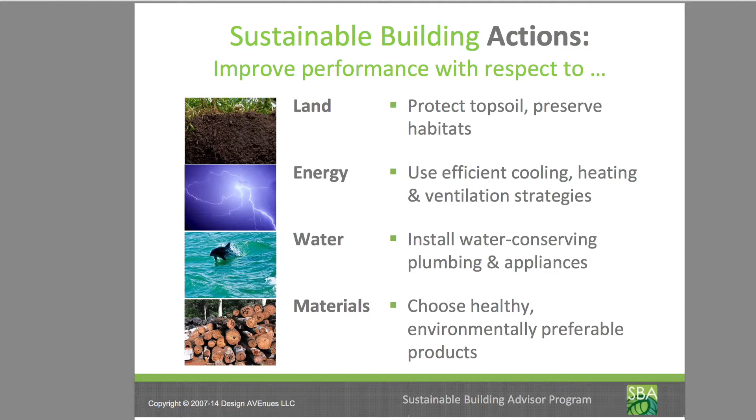Energy—you just heard from Robert about a number of strategies in this building. Lighting technologies, daylighting technologies, shutters that moderate our use of daylight, and effective heating and cooling strategies. There are many building enclosure strategies as well.

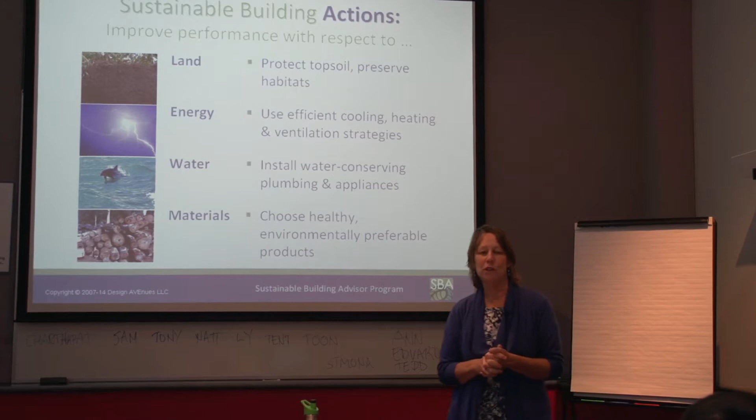Do we make buildings more airtight or more air permeable? It's probably a very different solution in Thailand, with a warm, humid climate, than in our California desert, where it's very hot and dry, or up in the mountains to the northeast, where it can be very cold. California has 16 climate zones that are quite distinct. It's particularly humorous because the whole United States is usually characterized as having 6 or maybe 8 climate zones, but we have 16 just in one state. So it depends on how granular you get.

We can break down those 16 even more into microclimates, and sustainable building design takes into account the climate and microclimate in which the project occurs. We have to be very plugged into the appropriate solutions for the particular location, rather than using rules of thumb, which can be very misleading.

Water is a very important issue for us in California right now, as we are in the middle of a drought—the most severe drought we've had in probably a half century or more, certainly within my living memory. We tend to be drought conscious in California because we go through cycles of drought, but in between we get lazy again and have to be reminded that we live in a drought-prone area. But worldwide, we have a freshwater shortage, because many people on the planet do not have adequate fresh potable water.

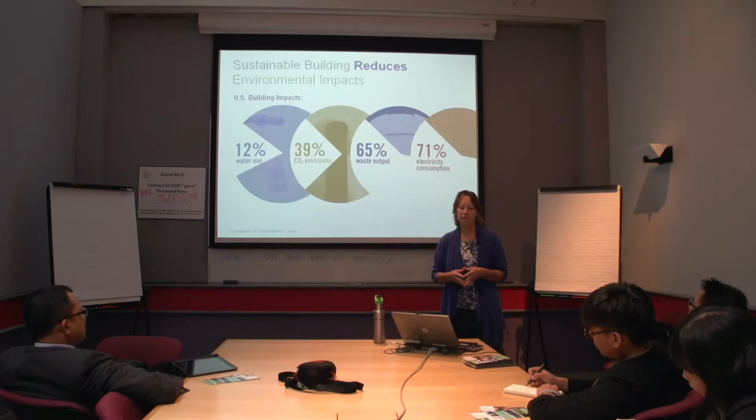Of all waste output, 65% comes from buildings. All carbon emissions, 39% from buildings. And water use, 12% from buildings. Water is still not insignificant, but of course the biggest water users are agriculture and industrial processes. Nevertheless, lots of opportunity for us to do much better in all of these categories.

So equally important, and really in terms of going back to Thailand and talking to other people about sustainable building, the thing that people tend to get most excited about is health, because health affects all of us and our families. I heard a statistic the other day that said something like 20% of all deaths are caused by cancer. And cancer, I think, is something that frightens everyone.

No one wants to have cancer, and we have more and more awareness that the decisions we make in creating the human environment often have implications for health. So we want to be more responsible in creating buildings that are healthier.

The U.S. Environmental Protection Agency tells us that we spend 90% of our time indoors, and the air quality indoors is many times worse on average than it is outdoors. So how crazy is that? We need to be doing much better than that, because right outside our buildings is air that is generally better quality than what's indoors. So let's get that fresh air into our buildings. We have the knowledge, we have the sophistication to do that. We need to be doing a much better job.

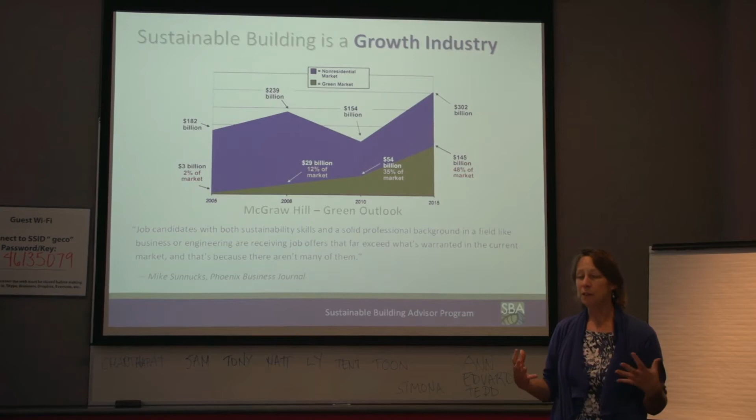It's also growing. And even so, here in the US, I expect it's maybe not too much different in Thailand, we have been in a bit of an economic downturn since 2008. Things are starting to look up. But you can see that even at our lowest point in the construction industry, the green building portion of the market was still growing. And when things started to pick up, it started to climb out even faster than the industry as a whole. So this is the healthiest, most vibrant part of our construction economy here, which is very exciting. It means lots of job opportunities in this field.

We firmly see that this is the future. Right now we think of sustainable building as something different and new, and yet it is going to be the new normal. Everything is moving in that direction. California tends to be at the forefront within the United States, and the rest of the country eventually seems to come along with our crazy liberal ideas. And then often much of the world looks to the US and follows. So I would say certainly from a California and US perspective, this is a very clear trend.

And this is just one example. There are numerous quotes and graphs, and they all support the fact that this is the direction we are going. It really is no longer a specialty, it's getting into the mainstream.

And this is even more true for younger people, that this youth sensibility towards building sustainably, this is just the right way to do it. They look at my older generation and say, why did you ever do anything differently? Crazy, stupid old people. So that means we're raising them right.

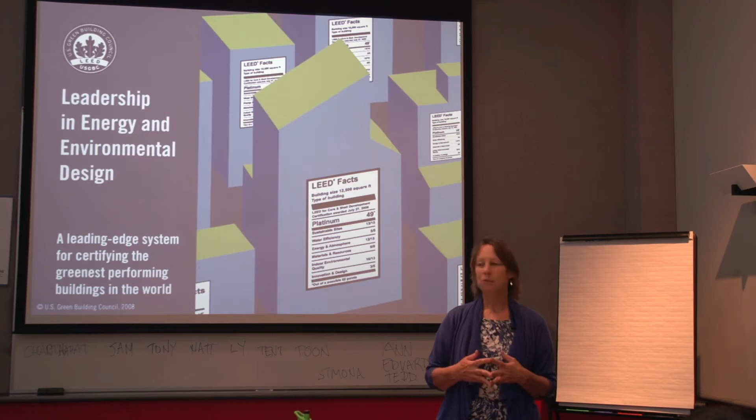I don't necessarily think all the new things in LEED version 4 are necessarily the right way to tackle these problems, but that's how we learn, right? We try them out and then we learn how to do them better.

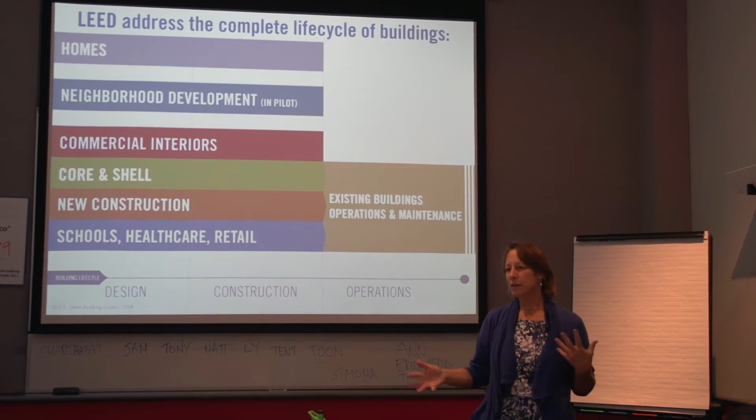You probably also know that LEED addresses all types of buildings across the life cycle. So it's a very comprehensive suite of programs, which can make life very complicated, but it's helpful.

Some baseline requirements: you're probably well aware of certified, silver, gold, platinum, that there are certain mandatory measures or prerequisites you have to do in order to earn the rating. Above that, there are points to be earned, and in some cases a minimum number of points within categories based on the rating.

So in the world beyond LEED, what happens next? There's a lot of debate even around the term sustainable building. Some people say, well, sustainable, that just means you're hanging steady, you're not really making progress. And green building, so-called sustainable building, has been criticized by many leaders in this field.

They say, well, you're just doing less badly. We've generally done very badly in creating our built environment. Now we're going to do a bit less badly. Okay, we're happy with an improvement, but can we go beyond that?

So now the hope is to really move towards projects that are truly restorative or regenerative. Certainly LEED can still provide very effective guidance in that direction. But I think it's always important to think that rating systems are themselves support, guidance, but they are not all that is possible.

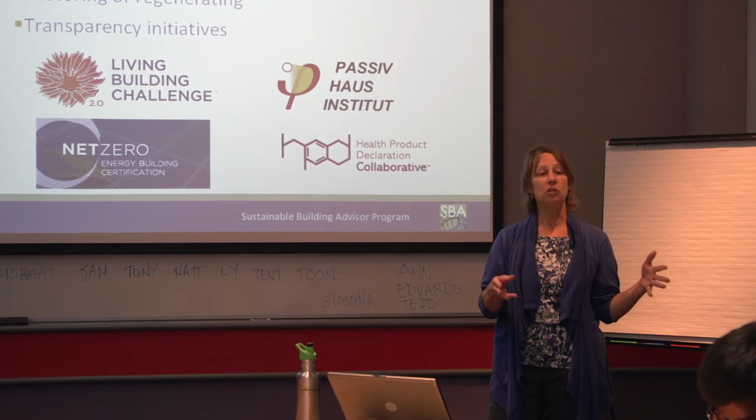Both Living Building Challenge and Net Zero require a year of operational data before the certification is given. So unlike LEED, it's not a program that was developed to assist in marketing a building, because by the time you have a year of operational data, you're probably not in the market anymore - you have occupants, it's been sold or rented or whatever. However, I think even presenting the notion that this building is pursuing Living Building Challenge or pursuing net zero will have some market attractiveness, even though it's not that kind of thing. You can't say we have it, we're pursuing it.

Passive House - any of you heard of Passive House? This is another one that's taken the US by storm in the last few years. It was developed in Germany, but interestingly enough, it was based on principles developed in the United States by Amory Lovins at the Rocky Mountain Institute, who's one of our real energy pioneers.

Passive House is a program primarily tailored for a Northern European climate, where a hard target of energy usage is set in terms of units of energy per square foot of building per year. A maximum energy use for heating is set, and a maximum rate of air leakage is established for the building. In a climate where it makes sense to have open air circulation, Passive House might not be the most sensible standard, but you should be aware of it because it's kind of the new darling in the world of sustainable building, at least in the US and Europe.

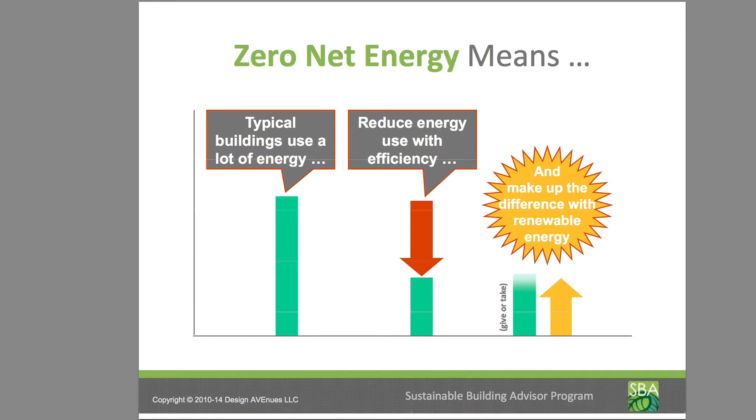And I mentioned zero net energy. This has been a huge focus for me for the last 5 years. In fact, 5 years ago now, right this time of year, I was launched into writing a book on zero net energy homes, and I've spent a tremendous amount of my time since then educating others about it in this energy center, as well as throughout the state and country and even beyond. The goal is to get not just our buildings, but our communities, to be more self-sustaining on an energy basis—so the energy we require to run, we then put back into the system by having renewable energy systems on our rooftops or adjoining structures, or through collaboration at a community level.

So that is the basic idea: we start with a building that uses a certain amount of energy, and we can almost always reduce that energy substantially. It's easier if it's a new building than an existing one; we have more challenges when we're not starting from scratch. But either way, our goal is to get our energy loads down to a fraction of what a normal building would be.

We can usually reduce energy use in a new building compared to a traditional one that meets building code by a good 60% or more if we really put our minds to it and make it a goal. With an existing building, it varies tremendously, but it might be 20%, 40%. We might get to 60% if we're really ambitious.

One of the conversations I often hear is, how much extra does it cost to design and build a zero net energy building? My answer is, it doesn't cost extra if that's part of the goal. Any more than the countertop in your kitchen costs extra if your goal is to build a new kitchen. If it's an essential part of your project, it's never extra. It's just a question of, I have my budget, how do I spend it in order to achieve my goal?

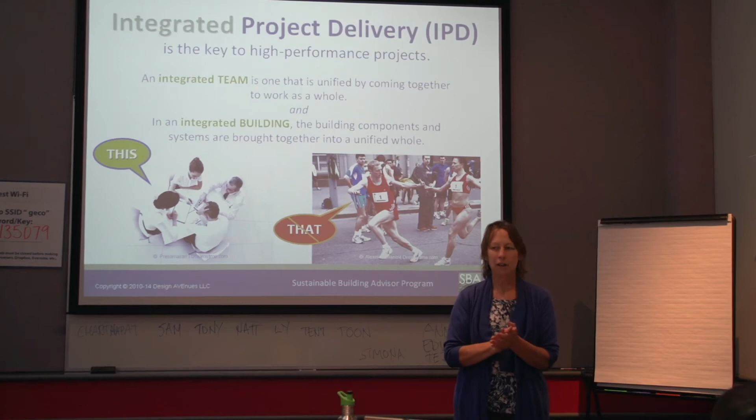First of all, the idea of integrated: it's how we work, and it's also what we produce. In terms of what we produce, the building, we achieve the highest performance through an integrated project because the systems all work together and complement one another. And we achieve that as a team because we need the different understanding, experience, background, and technical disciplines from all the parties on a project team to provide what they know in order to achieve this.

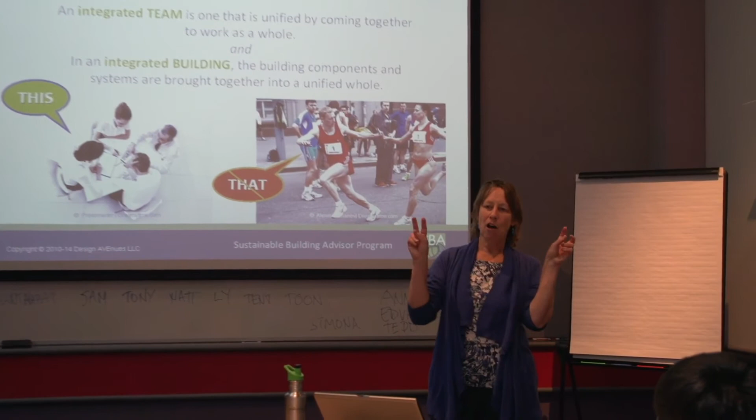I'll give you an example. Probably about 15 years ago, one of the big ahas in integrated design occurred when the US government funded a number of research teams through a program called Building America. Building America was a public-private partnership in which the federal government, the Department of Energy, provided seed funding to a number of energy consulting firms in order to allow them to work directly with American home builders, product manufacturers, architects, engineers, and trades. The charge they were given was to create the next generation of American housing that is more energy and resource efficient at zero or very low incremental cost.

And that sounds kind of crazy, right? But they said, you need to work together to figure this out. Well, what they figured out, because they worked together, is they got all those different players around the table and kind of scratched their heads and said, how are we going to do this?

One thing they learned relatively soon was, if we make our building enclosures tighter, so less of the air we're heating and cooling to make buildings comfortable is leaking out immediately, and we put in better windows, better insulation, we're doing a much better job on the building enclosure. We can reduce the size of the heating and cooling equipment substantially. The savings in the reduction in heating and cooling equipment paid for the other improvements.

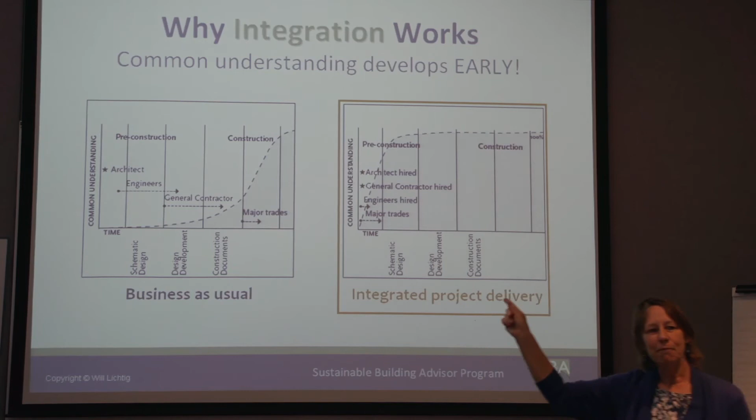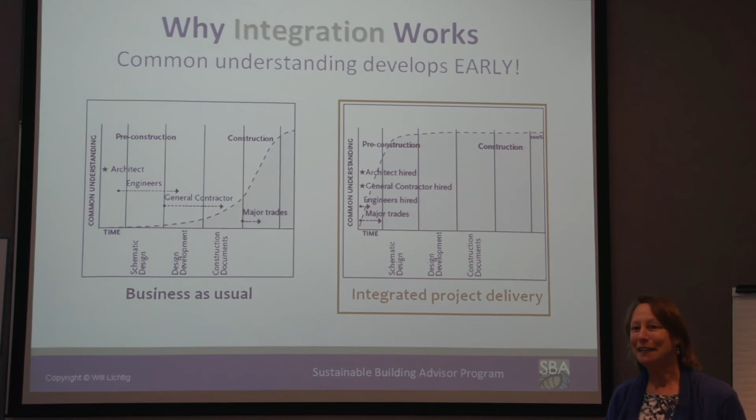Well, isn't that brilliant? We're finished. Now we all know what we were supposed to be doing in the beginning. Maybe in the next building. Yeah, exactly. Grand.

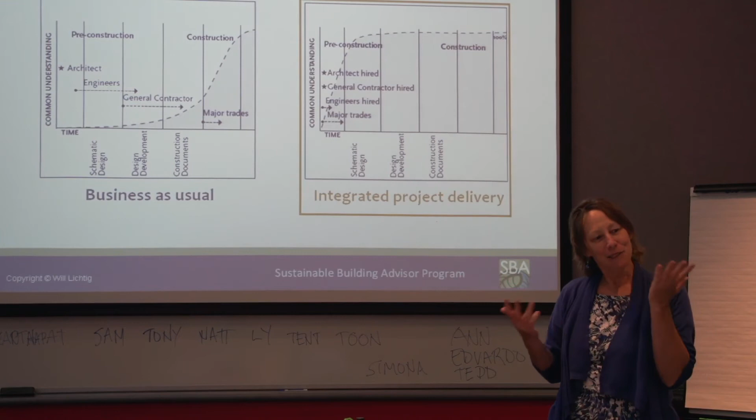I love this because it says, yeah, it seems so clear when you put it this way. By contrast, in the integrated project delivery model, we hire everybody at the beginning. So our common understanding climbs out really quickly, reaches a peak early, and stays at a peak throughout the project. Now, those of you who had calculus may remember that the area under the graph represents the aggregate value. So you can see that the area under the graph here is probably 3 or 4 times what it is in the conventional model.

And you think, how important, especially when we're looking for high performance. By definition, sustainable building is doing things differently, right? And so when we want to create something that's different, that's more advanced, it's absolutely critical that we have a common understanding about it among all the contributors to that project. So this really presents a very compelling picture of why we need to undertake integrated processes in order to get the results we're after.

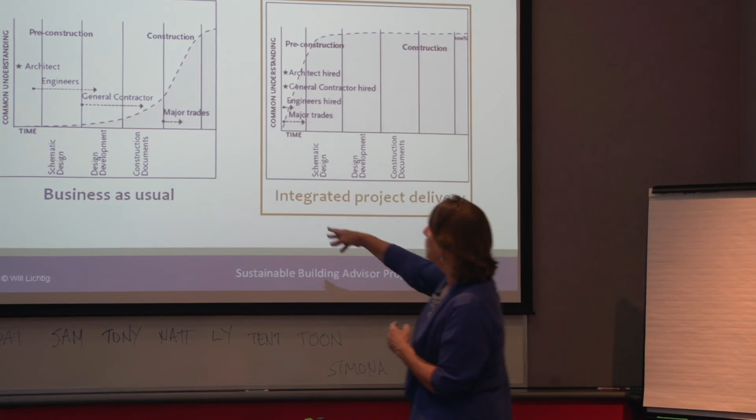Now, there's another aspect of this that I think is also incredibly important, and that is along the y-axis, we could replace common understanding with probably 15 or 20 other values. Can you imagine what some of them might be? What else might improve if you have everybody working together early? What do you think? The budget. The budget might decrease, yeah.

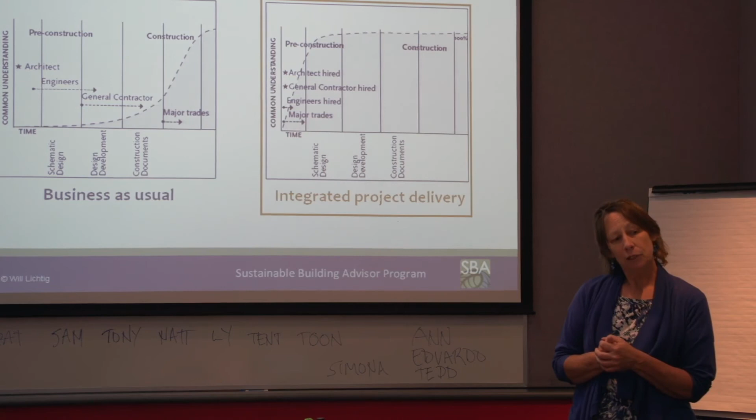Yeah, because you will have fewer change orders, right? So you're probably going to save some money. What else? Other thoughts?

How are people feeling? Happy to work together. Yes, much more harmonious working environment, right? Because they get to know each other, they're collaborating early, and they feel heard, right? Instead of, oh, if only they'd talk to me. Everybody's contributions are being valued. So it makes for a much happier team.

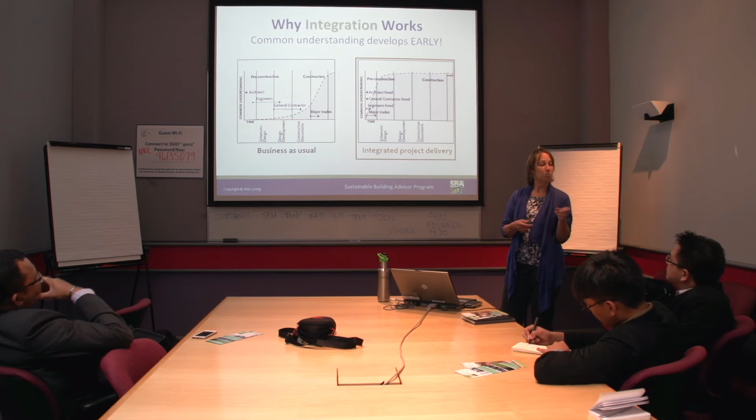That in turn reduces conflict, it reduces risk, reduces liability, reduces fault—finger pointing for blame, right? You're at fault. So it's a very, very powerful tool. And when people are working well together too, don't they produce a better product?

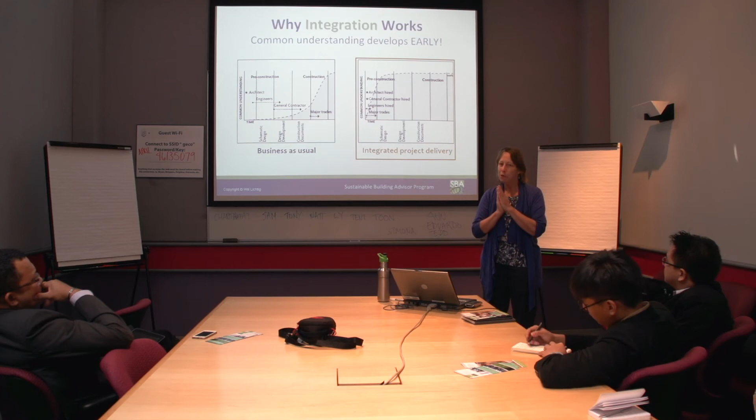So it's also really important to have the right people engaged in this process. I don't have a slide about this, but I have derived my personal rule: who are the right people for your team? There are 3 qualifications: experience, creativity, and commitment.

They're all very important. Now, not every member on the team has to have all 3 of those things, but if you have to give up, say, experience—maybe let's say Sam is new to this field, and so he doesn't have a lot of experience, but he might be hugely committed and enthusiastic. That's really important, right? So long as there's enough experience on the rest of the team, then that's okay. You wouldn't want everybody to not be experienced, because then that'd be a little bit risky. So, very, very important process.

Now, one of the things that's relatively new is, in order to engage in an integrated process where everybody is brought in early and everyone sort of has authority in the design process, ideally, responsibility is also shared contractually. Instead of, in the traditional model, the architect is sort of responsible for all and carries a lot of liability, and then the engineers in turn under them. And so there's this process of separating out the contractual responsibility for risk.

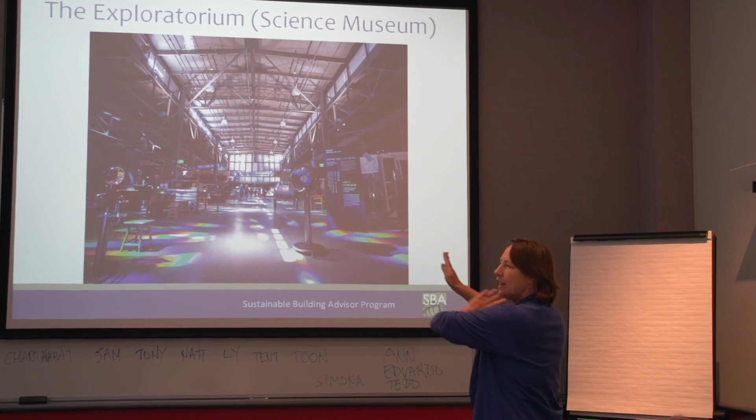This one's much more fun, the Exploratorium, which is a science museum. If you go all the way down Market Street to the bay at the Ferry Building and then along the waterfront to the left, you won't go far before you get to the Exploratorium. It doesn't yet have a full year of operational data, but it's on target to be zero net energy, and if so, it will be the largest zero net energy facility in the country. It's just a heck of a lot of fun. It's experiential, for children of all ages, if you know what I mean.

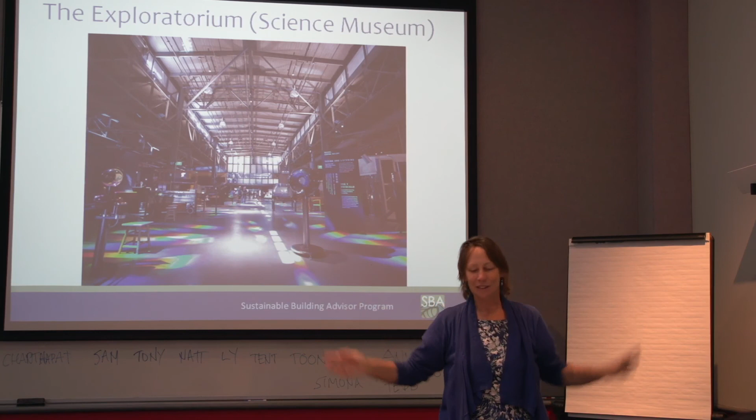One of my favorite things in the new museum is all the way at the back and then upstairs, there's a series of flat screen monitors about this big, about a dozen of them in a row. It's an art piece of waves breaking on the beach, the same image on every monitor, but the timing is slightly different, so it creates the sensation of a whole front. It's just beautiful, and then it changes, stunning. There's so many things to do in here. I highly recommend a field trip if you have time.

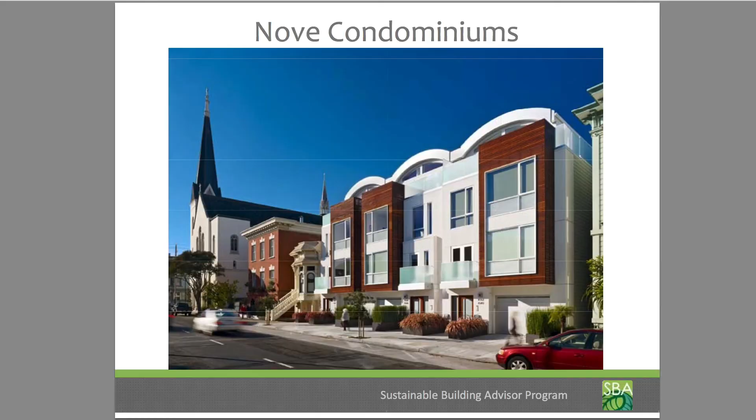And then these are Nove condominiums, in the Mission District here in San Francisco, a little farther south. This is a luxury condominium, so the other end of the housing spectrum, well, not quite the other end — I've worked on some really crazy, far more luxury homes, but these are new ones. This is actually, of all these projects, the only one I have worked on.

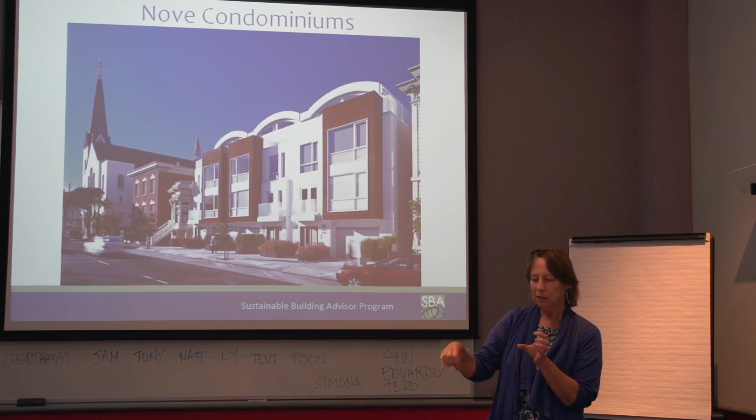This is a LEED Platinum building, with 9 units total, 2 in each of 3 buildings here. They're all zero lot line, stacked flats, with a small strip of garden behind, and then 3 more units behind on an alley. So it was a very clever use of urban space.

Okay, just a few minutes about our Sustainable Building Advisor program, which we offer in a number of locations, including one other country so far, Canada. I thought this might conceivably be of interest to you as you carry the sustainable building message back to Thailand.

Our program was designed to provide not only an education, but to craft a community or network for people who participate, so they become immediately a part of the green building community fabric in the place where they take the course, through working closely with fellow students and through a network of guest instructors.

You'll see our curriculum outline looks a lot like the LEED rating system. We touch on the same types of issues. In fact, the LEED rating system is grounded very much in the same knowledge base and the same philosophies as the Sustainable Building Advisor program.

This program has been around for 15 years. It actually predates the LEED accredited professional, and was birthed almost around the same time as LEED itself. So that's why it's no coincidence that we cover the same types of topics.

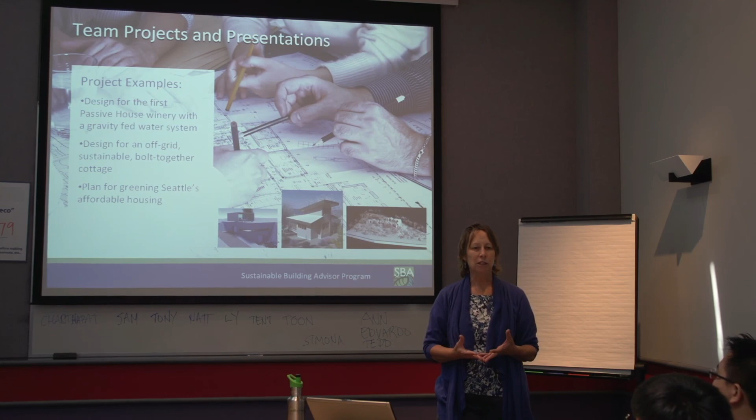Every time, it's a project developed by the students to support their own learning objectives. At the end, there's an exam, a qualifying exam, and they earn a certificate, becoming a certified sustainable building advisor, which is a nice credential to carry out into the work world.

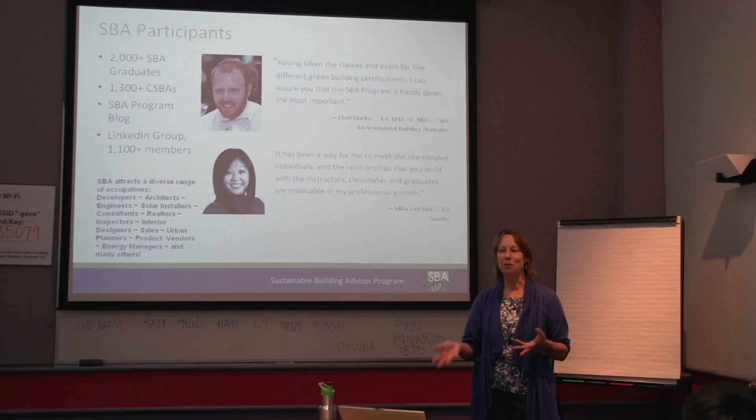We have more than 1,300 certified, I think we're 1,400 plus, creeping up to 1,500 now, sustainable building advisors. We have folks who come from a ton of different backgrounds and move on. It's very common for them to go on to work, and even some have started their own businesses with people they met in the program, or have gotten jobs from instructors in the program. So they're very successful going out into a huge range of industries, taking on sustainable building roles, and there's a list of some of those industries.